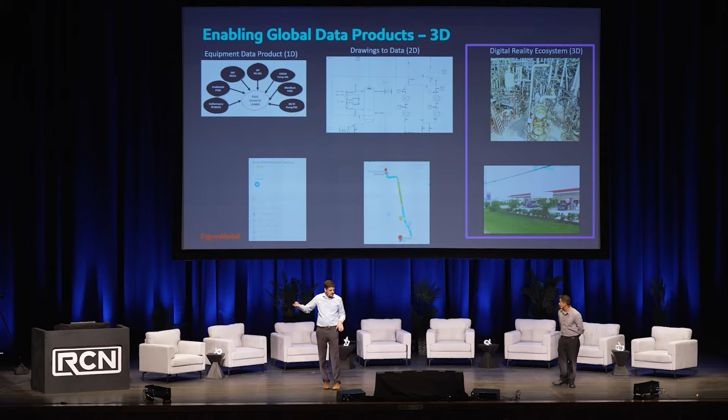To that delivery mechanism aspect of how do we build plug-and-play data systems, we talked about that Venn diagram. Let's see if this goes backwards. We talked about this aspect of the three different areas of data and the data products, right? And we also talked about, well, let's see if it clicks or not. It won't go back any further. We'll just talk about it, because I don't think it's going to go any further.

There it goes. You've got these different areas of the Venn diagram: the top right-hand corner, the visualization, a lot of the data and the simulation. Well, all of those engineering systems, those inspection systems, we have to make that data plug and play. Meaning that if I'm using it in a digital twin tool today, I should be able to use it in the inspection tool tomorrow, and both of those data sets should be able to flow back and forth. We've made really good inroads there with great partners that are here as well.

All right, let's see if it'll click. Clickety-click. That animation slide usually takes a while to go back, so apologies, guys. There it goes. Okay, cool.

To the aspect of how do we actually build anytime, anywhere consumption systems. What we mean by that is not only from a technology perspective should I be able to use the right tools for the job. So if I'm needing to use a tablet today in the field, or I'm in one of our remote technology centers, I'm using a PC or even a high-end machine for some of our engineering, I should be able to use any particular tool and still have the same grounding of data and information.

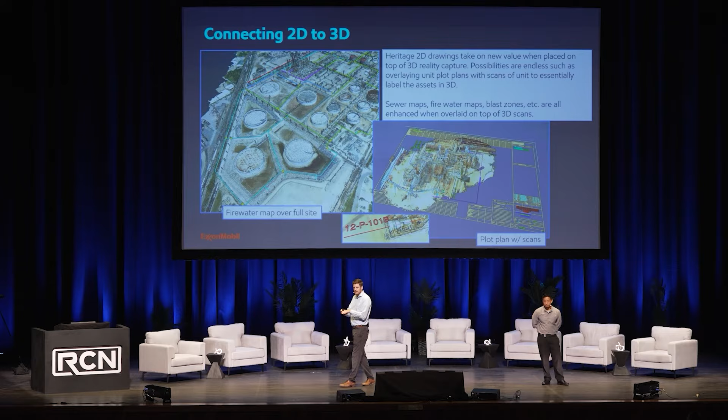Now there's work efforts also as well to move a little bit past those drawing side stuff and into more data feeds and data enrichments, leveraging AI to be able to work some of that stuff. But for right now, end of the day, tying all of it 2D to 3D in the real world. Reduce that cognitive load.

Overlaying 1D data with 3D. We overlay 1D with 3D so that we can create those relationships. As you see those blue boxes, that's really our bounding boxes. This geospatial bounding box area holds a relationship to these other types of data products, and that's what's being saved in the digital thread.

We'll talk again here in a little bit about that reality-first mentality. You've got your drawings, you've got your models. A lot of the times we've got brownfield assets that don't have those drawings or models, and maintaining them and keeping them up to date is a time-intensive piece of work. So you leverage the right information at the right time, build bounding boxes around things that are spatially reality capture, and then take that spatial data from your CAD that already exists.

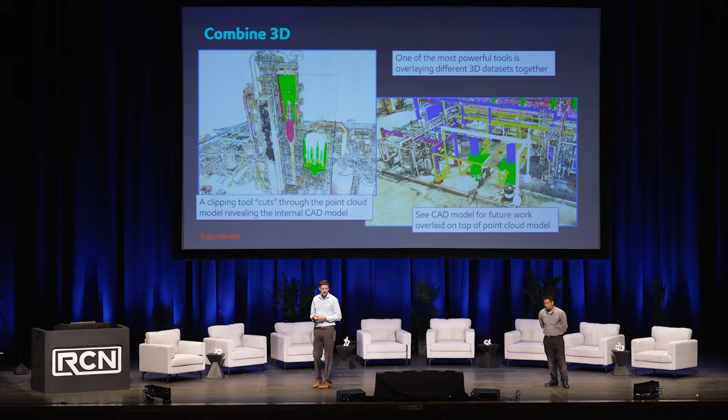Combining with other CAD, like we mentioned before, internals of vessels, and allowing us to see that in real time. So as I'm modeling out a vessel and ultimately tying it into the real spatial plane, the same exact location, I can get a ton more context into the real world. Now we can see the inside and the outside at the same time, right?

So capturing that data, combining it, overlaying it, and so forth leads to all these other use cases. We can now take accurate measurements. We can view, we can plan, we can scope. Again, being there without being there was a big key for us.

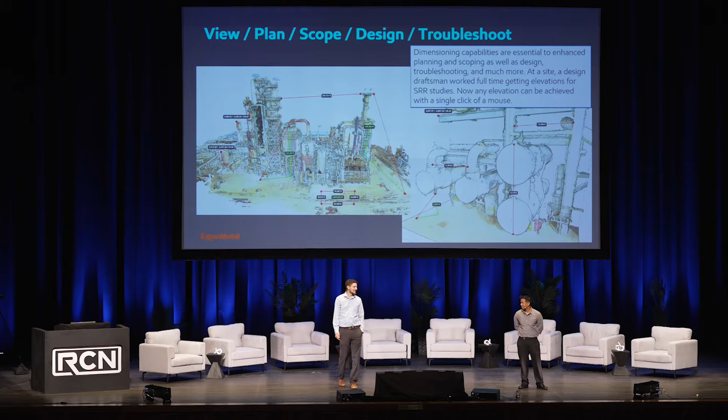Some of our sites, this used to be a full-time job for an individual just to get elevation. Now we can do it at our desk. Used to, still is sometimes. I know, I'm being hopeful.

Tying that to projects and being able to tie in brownfield areas to new builds really helps us gain alignment during that FEED process or the detailed design work that would happen. This has probably been one of the biggest areas of simple data integration, being able to tie together spatial data to reduce cost up front on those projects.

You see those colors, right? Red - visually, something's wrong, let's hone in on that. Versus sifting through spreadsheets to understand exactly where something is wrong, this reduces the time so you can tackle that problem as soon as possible, visually.

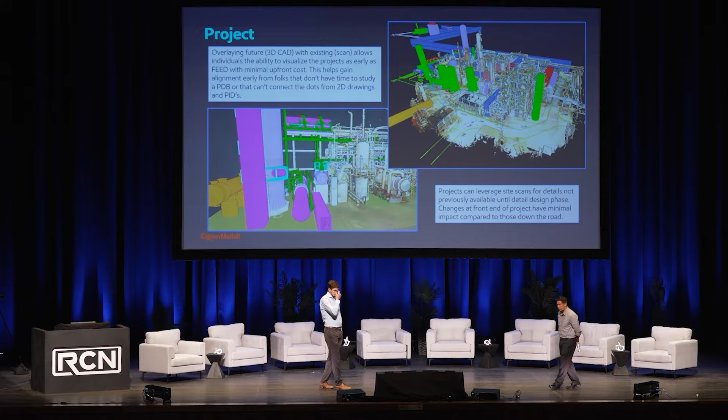Turnaround and planning. Cranes, for example, cost a lot of money for us to rent. Before we actually start executing our work, we've got to plan where that crane needs to go. Can you imagine if you didn't have a digital reality and had to try to work out that route for that crane? Oh, it didn't fit, it didn't make it there, it's going to be an extra day, we're delayed. But being able to do that visually, to understand exactly where it fits or what it's going to collide with in the digital reality, has allowed us to save a lot of that time.

Kyle talked about spatial awareness, right? But look at our work list - we can actually see from a top view where they are spatially now. And at the same time, we talked about layering data.

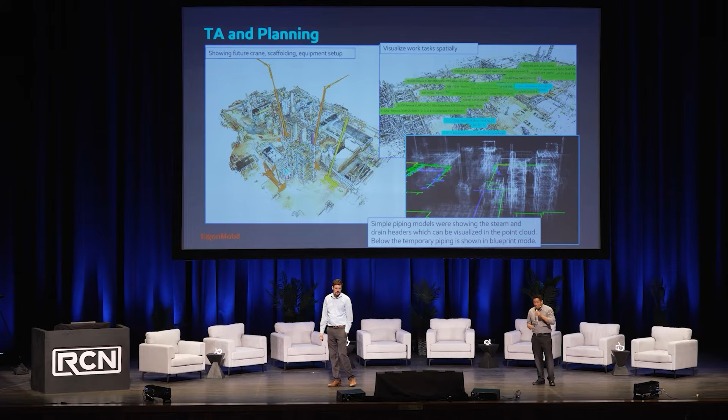We can reduce certain contrast, so that photo down here is really a visualization of temporary piping. But again, where is that piping? At least I have some context on where that is going, so we can have a meaningful conversation to get the job done. This in the project space is probably one of our biggest benefit areas for sure - being able to spatialize data that you weren't able to and give it context.

Enhancing visual inspections - there's a really neat workflow being built inside the company with a couple of partners that we're calling Air 3D, allowing us to do anomaly detection through AI. One particular company feeds all of the visual data into a three-dimensional model and outputs all of that information as red, green, yellow depending on the particular anomaly, so you can see it all in the real world. Do not go through lists of information to determine anomalies for an inspection data point - visually look at it. Em likes to talk about this quite a bit.

Now let's take that same information and put you in the field, able to look at the anomalies from the field and all of the cuboids of information. I've got more context now than I ever would. There are multiple different use cases here - whenever you're building this spatial data, I can use it from above site, which is happening quite often, or hopefully move into leveraging it in the field as well, doing the same thing for internal inspections, and being able to spatially set that information and data.

I'll add one of our Asian sites. They actually created a deck that said, DRE has given us superpowers. This slide kind of marries to that, where they're saying the technology layer for DRE allows us to see all the way up there. So technically we have that vision. We also have X-ray vision, because now we can see the internals, with the technology porting that data over to your device. Long story short, you've got the data in the palm of your hands, wherever you need it. Now if we could just have the superpower of flying, that would be great.

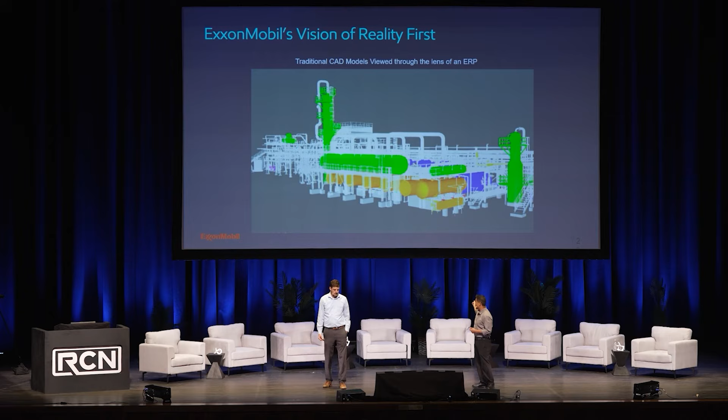With the fidelity of reality capture, click it for me, please. Thank you. It gives you more contextualization. But it's even more powerful if you combine them.

What we've learned is, if you wanted to update the CAD model, what do you do? We go out and laser scan something, and afterwards send it overseas to have some low-cost engineering model that. That's great, but how often are you going to do that? In our world, you got to do it pretty often because things change quite a bit. What we also learned is previous platforms, no matter how high the fidelity was, people still didn't trust that data.

Because things changed, it was also a cost-plus environment. So that led us to, okay, well, if you're already scanning, what if we just stop there? Because then those images are reality.

What we like to say is we're trying to bring a consumer-grade experience to the industry. Because when you go home, when you're done with this conference, what do you do? There's already a certain expectation you've been exposed to. Yeah, I'll doom scroll through as well. Long story short, our folks at our sites already have a certain level of expectations. It might just be, hey, Google my satellite image, Google Earth, or so forth.

When we started doing reality first, we gained trust. We created a cost-minus environment. And at the same time, that led us down this exploration of, okay, well then...

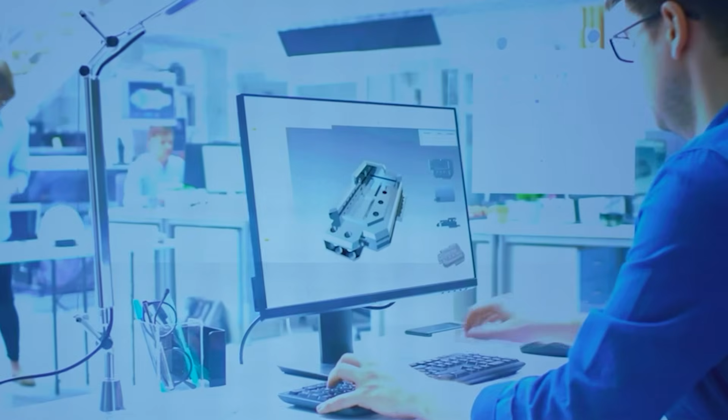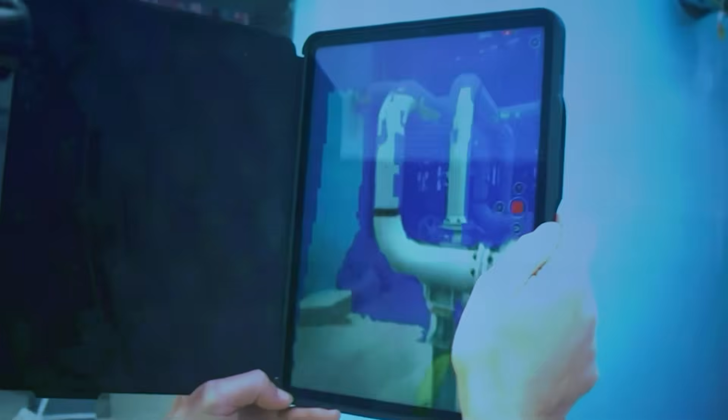This is how ExxonMobil has moved to a visual way of working, folks. From laser scanning to virtual reality, 3D models and other digital data captures are quickly becoming must-have technologies in our industry. Globally, ExxonMobil has spent tremendous resources on independent 3D efforts, from capture to creation, and even purchased visual assets. These 3D models help us gain better insights, make informed decisions, visualize disparate data, and streamline innovation. However, many of our 3D assets are stored in various locations and used locally when they could be leveraged across ExxonMobil facilities. As part of a company-wide initiative, we're establishing a digital reality ecosystem, which will serve as a foundation for our 3D visual assets platform. This ecosystem will help us capture 3D models in formats that everyone can use, centralize where they are stored, and automate the way they are delivered, so they can be used by anyone, at any time, from anywhere. This ecosystem will allow us to move toward a more visual way of working with contextualized data, which will be essential to our success for corporate scale and integration, now and in the future.